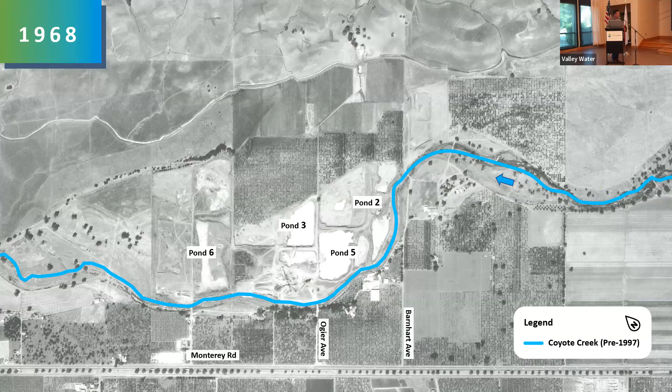So the flood flows at this point would have been after both the dams were installed. And so we do have attenuation of regular flood events, which is probably why the gravel mining got started. It's easier to work in the channel. There's less big water coming through.

So another 25 years later, we're in 1993. You can see Highway 101, model aircraft sky park. The gravel mining is ended by now, and the ponds are similar to what we have today.

However, note that Coyote Creek is now squeezed between the cherry orchard and Pond 1 at the end of Barnhart Avenue. I'll just back up to show that change. So at the close of mining, a small earthen bypass channel was constructed to keep Coyote Creek out of Pond 1. However, the undersized bypass channel was breached in '97 during a high flow event.

And since then, the creek's flow through the ponds. Jumping up to present day, you can clearly identify the golf course, 101, aircraft sky park. Now you can see Coyote Creek flowing through the ponds, and there's some new buildings and some of the orchards that remain just south of Barnhart Avenue.

So just a quick visit back at Pond 2. The problem is not obvious if you're just looking at the beautiful pond. However, if you were a steelhead, you would see things differently.

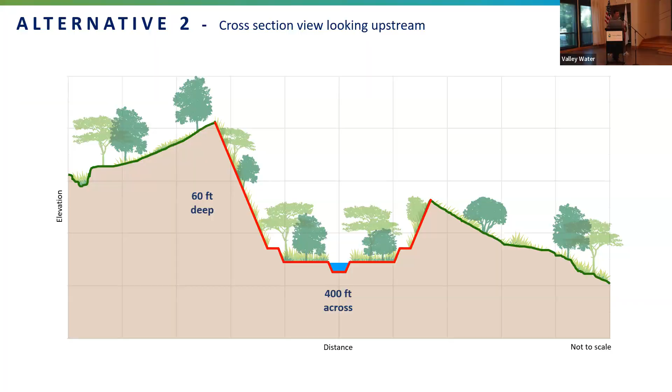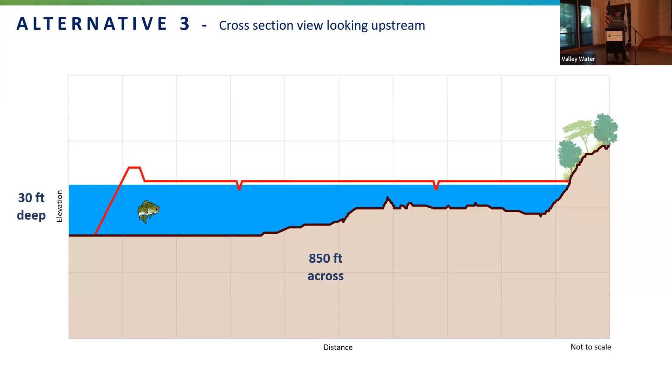Here's a cross-section view. It's another underground or underwater view of the proposed alternative. Note that the area beneath the red line would be filled with imported earth. However, some of the pond would remain. This would be about 850 feet across, so it's a very wide swath.

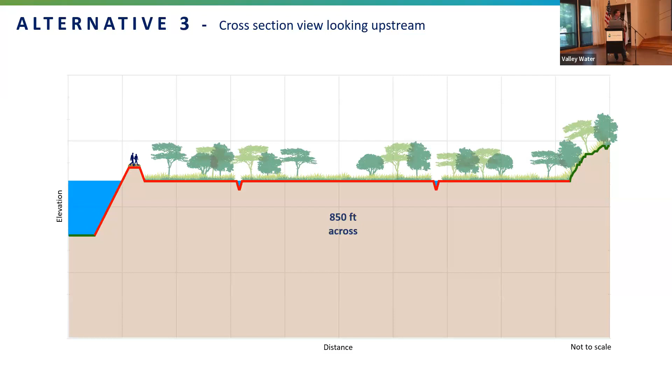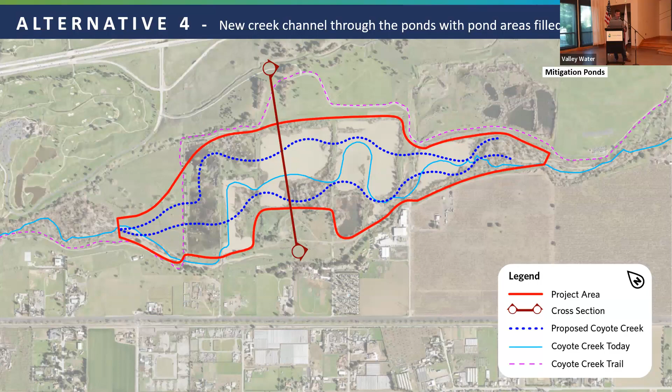Alternative 4 completely removes all of the Ogier Ponds and would restore the landscape to pre-gravel mining conditions. Impacts to the trail would be similar as for alternative 3. And the amount of imported material would be slightly greater to completely fill the ponds. This is about 1,200 feet across.

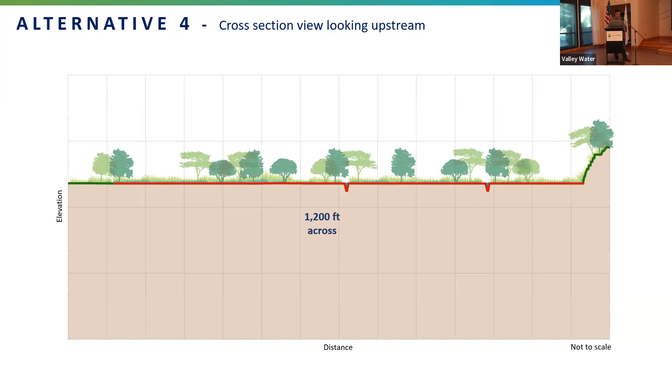Moving on to alternative 5. This is a sort of hybrid approach that realizes that the 1997 channel, which was constructed after mining, was too small, so this makes it much larger. We have 2 cross sections shown, one at Ogier Avenue and one at Pond 1. The difference being that at Ogier Avenue, we'd be cutting into existing ground to create a floodplain and reusing that material to fill up Pond 1. However, the amount of material needed would require importing material. But there would also be a separation berm that would keep the new channel out of Pond 2, and that's also another large volume of imported material.

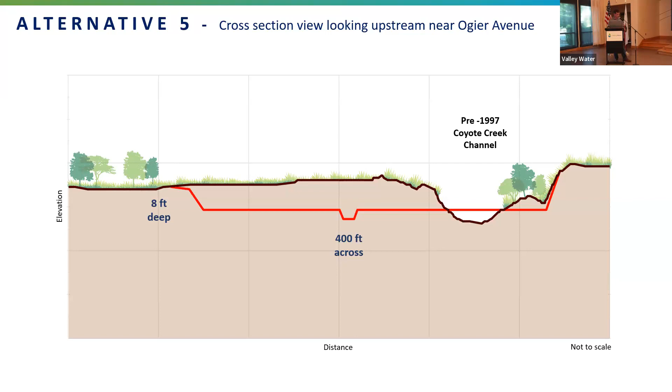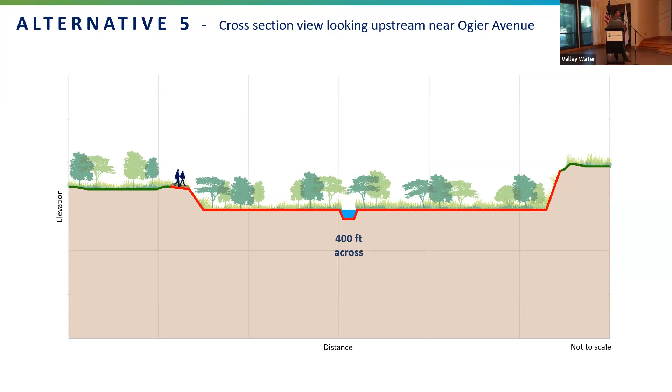So first we'll take a look at the Ogier Avenue cross section. We would dig in about 8 feet into the ground, and you can see the old pre-1997 Coyote Creek channel on the right side there. That would be partially filled. And we would create a 400-foot wide, 8-foot deep new channel with appropriate vegetation and spawning gravels and a riparian corridor for steelhead. This next slide is at Pond 1 upstream section.

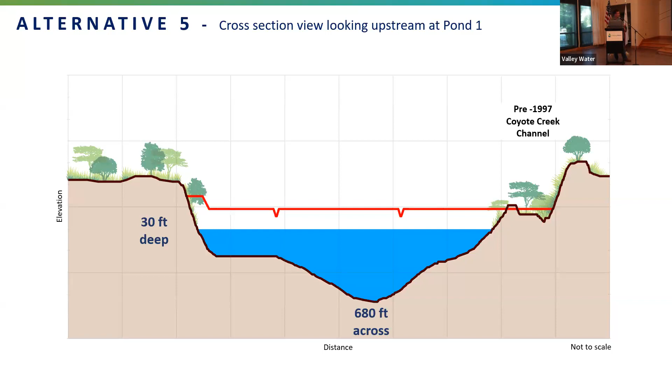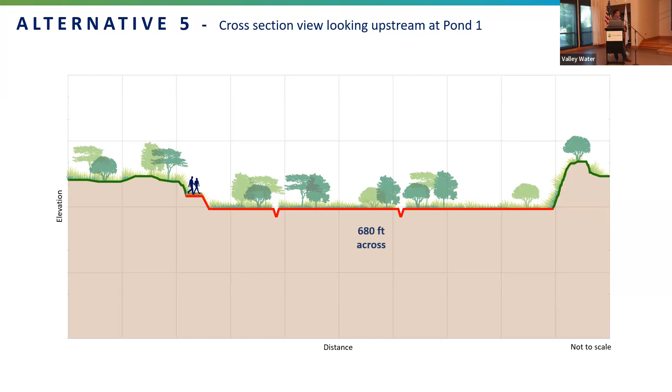So here we'd fill up to the red line, creating something similar to this. Actually, there would be water in the channels, and we could have a hiking trail or maintenance road shown. But this is a wide channel, 680 feet across for Pond 1, and you can't necessarily partially fill it because it's so deep. So this would be a...

...win for floodplains. Alternative 6 is similar to alternative 2 in that it completely avoids the ponds. It's identical to the last alternative in the lower half, Ogier Avenue down, but in the upper half, instead of filling the pond, it goes into the orchard.

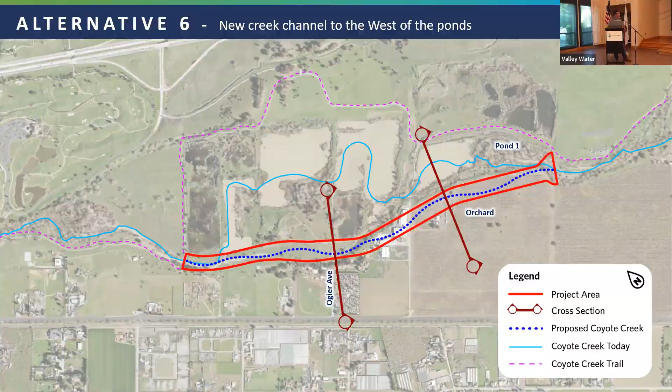And this alternative would have very little impacts to the county trail or the model plane park. Just to review, the Ogier cross section is the same as alternative 5. And the Pond 1 cross section, upstream, would actually cut into the orchard that's 300 feet wide and about 8 feet deep, new channel.

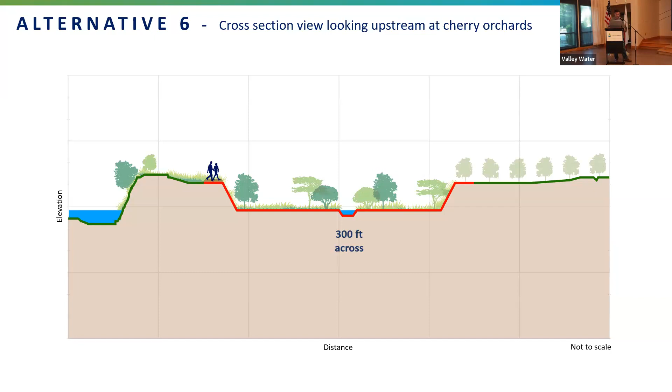So back to the busy slide. To try and summarize, alternatives 2 and 6 bypass Ogier Ponds completely. Alternative 2, the red shaped graphic, would bypass to the east through a hill and would include multiple impacts to the Coyote Creek Trail. Alternative 6, the blue shape, would pass to the west through private lands in the pre-1997 flow path, and include little or no impacts to the trail or the sky park.

Alternative 3, the orange shape, would import earth to partially remove the ponds and create a wide landscape. There would be some impacts to the trail where it intersects and cuts across the creek. We would have to manipulate that in some way to adjust for the new wide floodplain.

Alternative 4, the purple shape, would completely remove the ponds and create an even wider landscape with more fill imported, and would have similar impacts to the trail as alternative 3. Finally, alternative 5, the green shape, would import earth to completely remove Pond 1 and would reoccupy the pre-1997 flow path with little or no impacts to the trail.

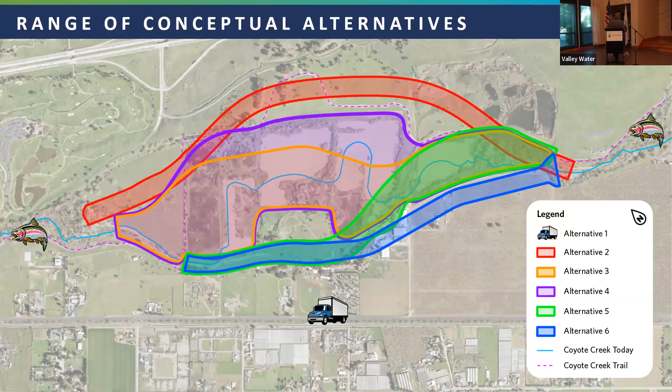Impacts to recreational facilities vary significantly. No impacts for conceptual alternatives 1, 5, and 6. However, 2, 3, and 4 would definitely require the trail to be modified, and would also disturb access to the model aircraft park. The earthwork impacts also vary significantly.

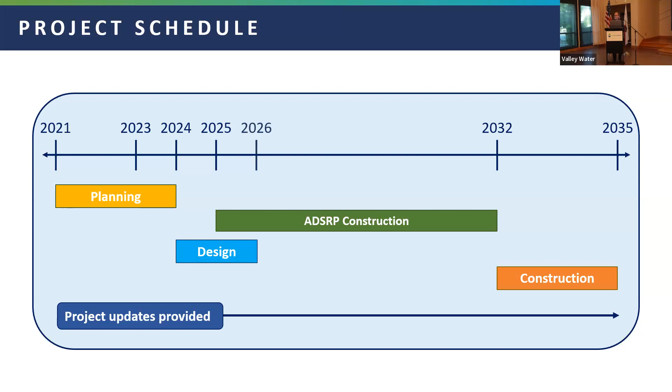The Ogier Ponds complex is the largest set of remnant gravel pits on Coyote Creek, and the site is really problematic for salmon and steelhead. We expect the Ogier Ponds restoration project is going to provide multiple and significant benefits to native fish and wildlife, including the federally threatened Central California coast steelhead.

By restoring riverine conditions with an adjacent floodplain, that will have the effect of restoring in-stream habitat for steelhead and salmon. The adults will be able to navigate freely through this reach, and they won't be forced to navigate a gauntlet of ponds and culverts to get upstream and move downstream.

Similarly, the juveniles, smolts, which are moving downstream to the ocean, with a new riverine channel, will not have to swim through the ponds and be subject to predation by the largemouth bass that Kevin was discussing with us.

Equally important, this is a mild channel that can be returned to suitable spawning conditions and juvenile rearing habitats. So there are multiple benefits for native fish, and if we have Fish and Wildlife Service here, we'll probably hear more about benefits for other native wildlife too.